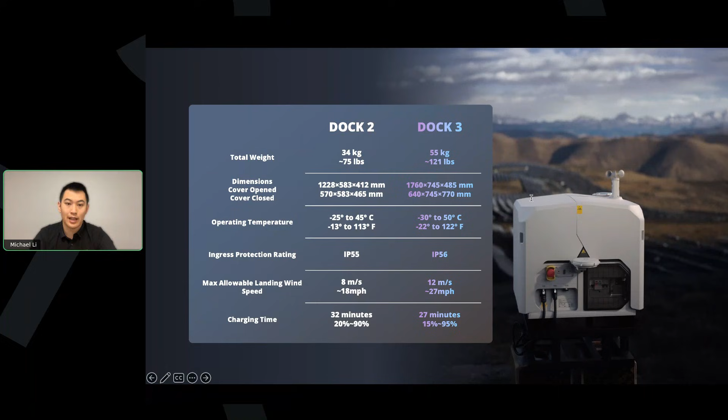We also increased the operating temperature specs, increased IP rating, and max allowable landing wind speed. So things just got overall better. The charge time was also decreased, allowing 15% to 95% charge in only 27 minutes.

So some of the use cases I've seen with the Dock 3 being used currently right now - this is an example of pipeline inspections and saltwater leak use cases in the oil and gas industry. We have underground water transfer lines, and when there's a leak, you're able to essentially inspect the vegetation in the nearby area to see if that leak is happening.

Also for buried lines, we were able to inspect them and assist in watching for any vegetation loss.

And then above ground or new leaks, you can use the Dock for any thermal imaging detection.

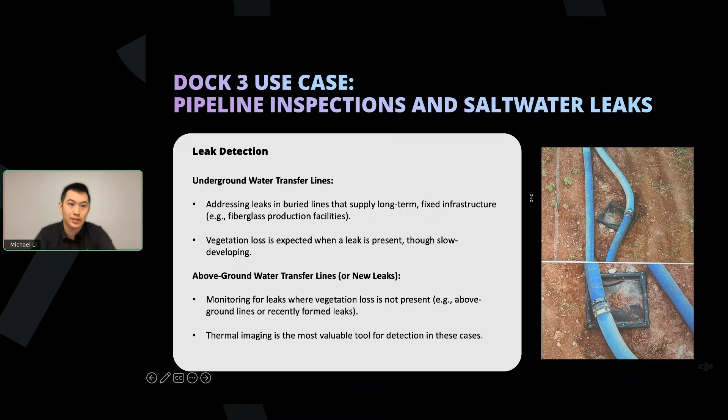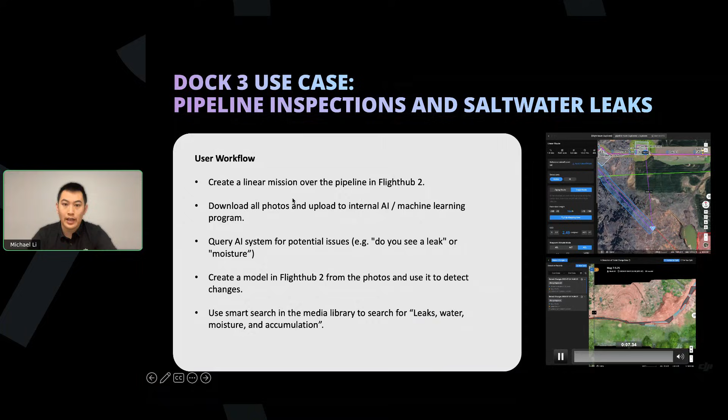They were also able to use the Dock 3 for equipment inspection. The Dock was able to help check gas meters for integrity, tanks for levels and spills, and also inspect separators for leaks or smoke, flares for any flames, and wellheads for any vapors.

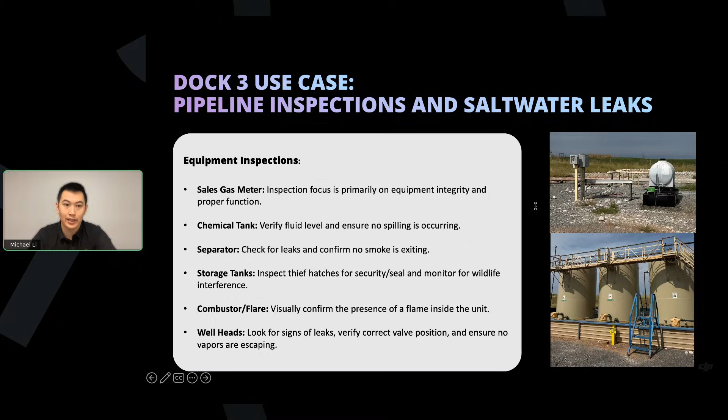For this use case, they were able to use the virtual cockpit in FlightHub 2 to control the drone and take off. They were able to use side by side view to get visual and thermal at the same time, and they were also able to save annotations and any media, all saved within FlightHub 2.

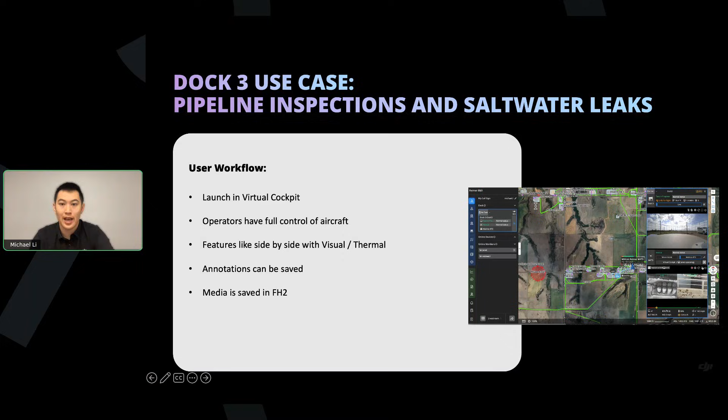So this is kind of a sample of what they would see in FlightHub 2 while flying.

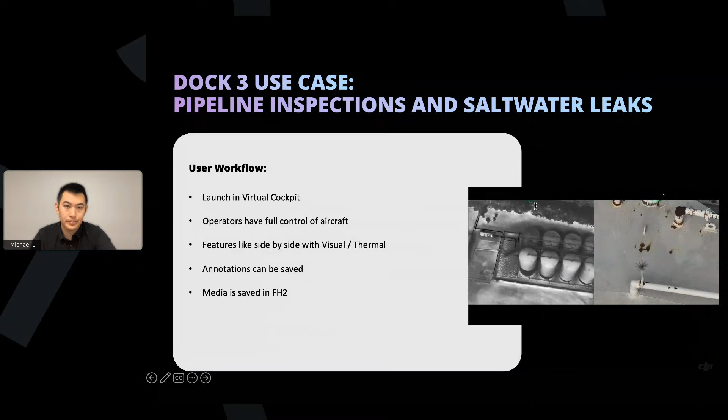Another use case within pipeline inspections and saltwater leaks involves drilling completion, which includes pad preparation. They're able to inspect these rigs for safety and operational details. This phase includes a lot of challenges and is pretty costly.

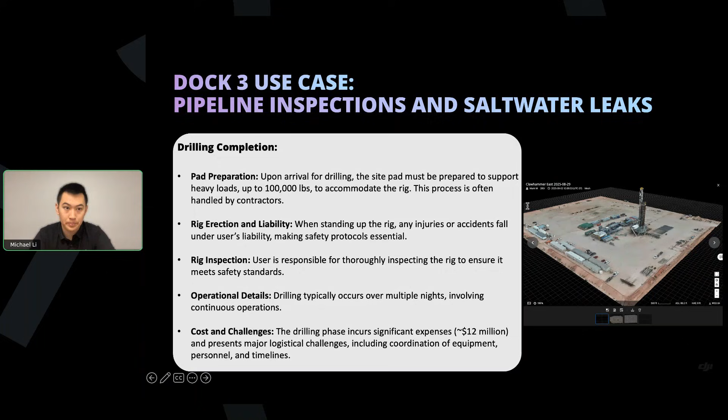You can see in this photo they were able to create a model. What they did was, in FlightHub 2, they created a simple route around the drill rig, and they were able to generate a model to have different models and inspect it over time.

On top of that, they were able to take panorama photos around the drilling rig. You can see this panorama photo right here in FlightHub 2 is pretty useful.

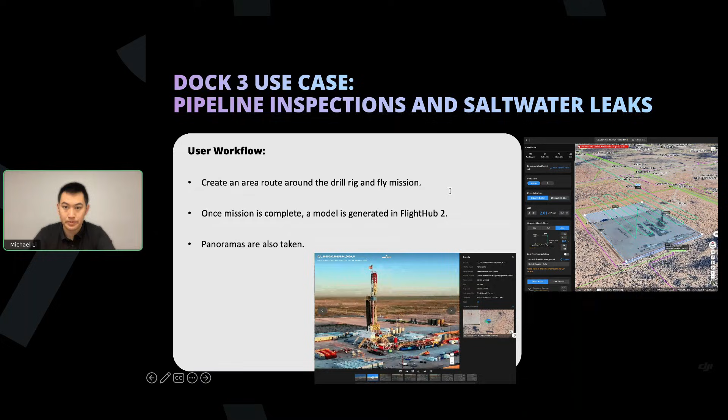Okay, going into the Matrice 4D, the 4TD, the 4E, the 4T, and the 400 -- these are our drones on the Enterprise side.

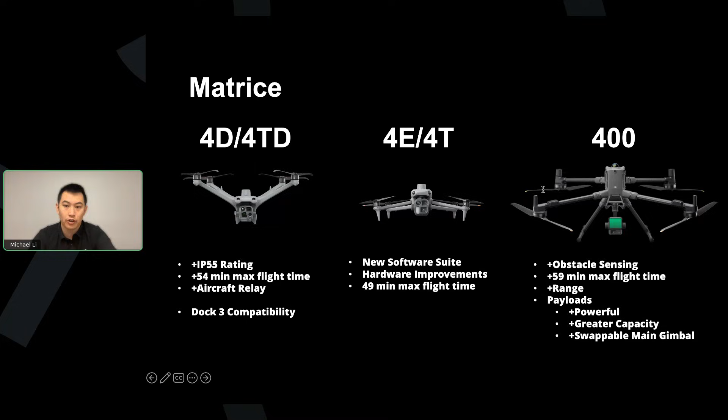Going over the Matrice 4D and the Matrice 4TD, this is the one that's inside the Dock 3. Then we have the Matrice 4, the Matrice 4E, and the Matrice 4T, which is very similar to the Dock 3 drone, but this is more of the entry-level Enterprise drone. And then we have our flagship Matrice 400 RTK, which is our biggest Enterprise drone.

Going into the 4D and the 4TD, reminder, this is the drone that's inside the Dock 3. So this one is the 4D. You can see some of the specs it has: a tele camera, a laser rangefinder, a mid-tele, and a wide-angle camera. So we have three visual cameras and a laser rangefinder.

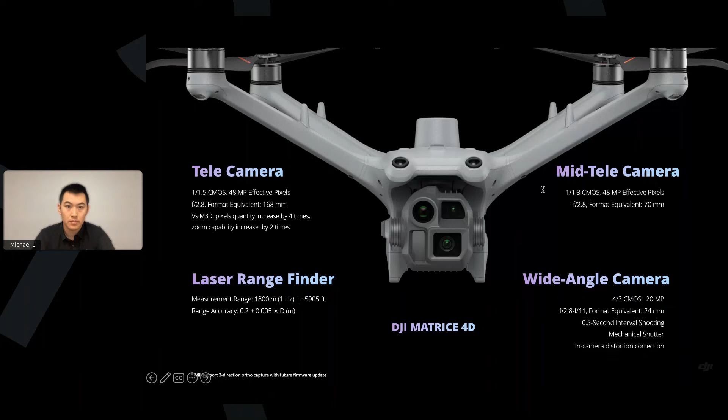Going into the 4TD, the main difference is having a thermal camera. The thermal camera is on the top left, the mid-telecamera is on the top right, the telecamera is right below the thermal camera, the wide angle is below that, and a laser rangefinder and a NIR auxiliary light are on the bottom right. So you'll notice the 4TD does have the thermal camera and the NIR auxiliary light, but with that we lose the 20 megapixel true resolution mechanical shutter that the 4D has.

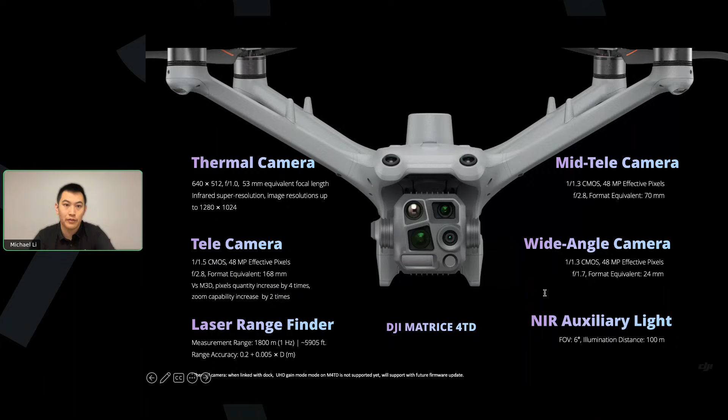So this is a quick video of the Dock taking off and being controlled in virtual cockpit. If you're not familiar, this is our software called DJI FlightHub 2. It's used to control the DJI Docks. In it, you can plan missions, fly missions, get a live view, stream, and do all sorts of manipulation to essentially control the drone.

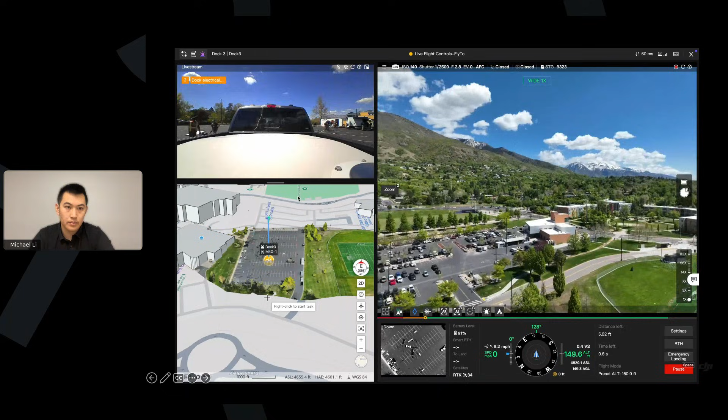So you see you can move the camera, take photos.

Going into the Matrice 4 and the 4T, some of these features you'll see are very similar and also available in the 4D and the 4TD. Now the Matrice 4E and T, we offer features such as AI to detect people, vehicles, and boats.

We also have a zoom now that goes up to 112 times. We've improved low light for better obstacle avoidance, night scene modes. We have precise mapping, also faster and safer takeoff. And then the range of the drones has increased significantly too, now with the 25-kilometer transmission with their new OcuSync technology.

Some key specs with this drone: 15-second fast takeoff speed, 10 meters per second ascent speed, 21 meters per second forward speed, and 25 kilometer transmission range. Also 8 meters per second maximum descent speed, and 49 minutes flight time. So that's increased by 6 minutes from its predecessor.

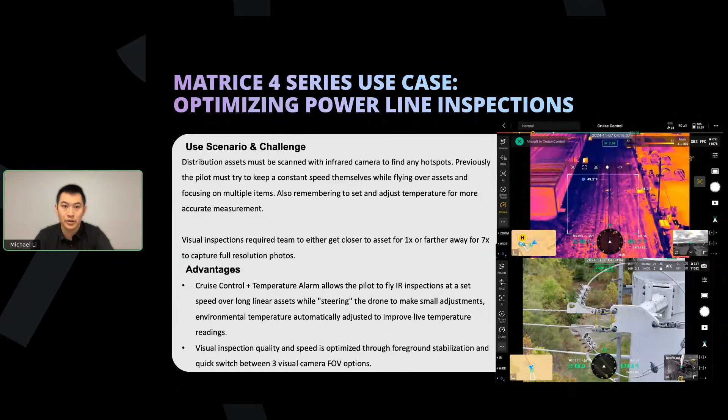Advantages, let's see if there's a video plays. The cruise control is used for steady speed. You can see auto temp alarms being adjusted in this video, and obviously you also have visual at the same time too. So you can see a pretty powerful small drone that's able to accomplish a lot for these powerline inspections.

Okay, going into the Matrice 400, this is our flagship, biggest drone we have on our DJI Enterprise side. With that, we're going to have multiple payload capabilities, including your H30, your P1, your L2, S1, V1, and now the new Manifold 3.

Some powerful specs include 59 minutes of flight time with the payload. That's pretty impressive, almost about an hour with the camera. You have 25 meters per second flight speed, 6 kilogram payload capacity, and that 40 kilometer range with OcuSync technology is pretty impressive too. You have real-time terrain follow, and also now able to ship-based takeoff and landing with the M400.

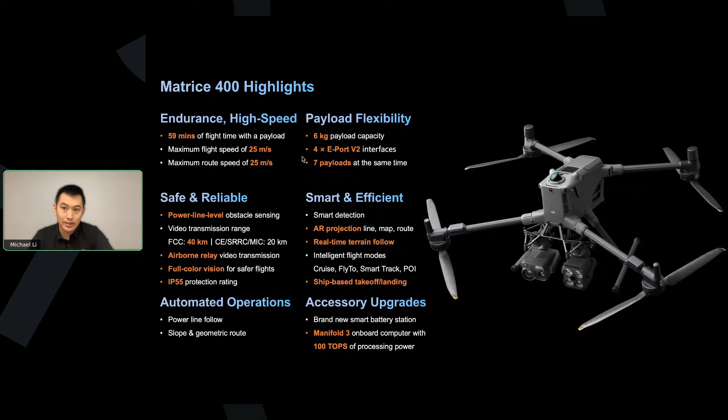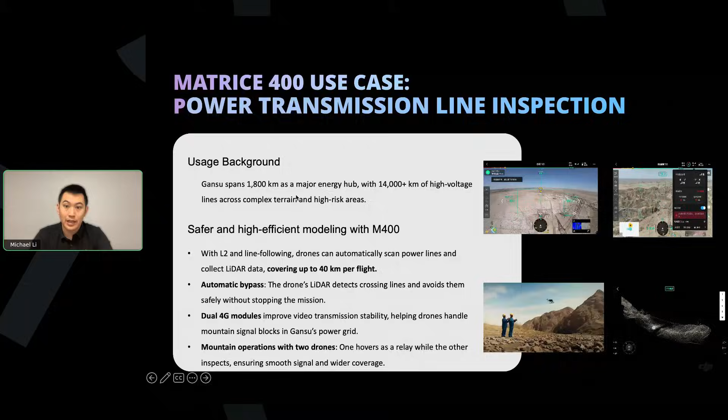Going into the Zenmuse L3, this is a new advanced LiDAR that's very impressive with 16 returns, 950 meter range. These are some of the new specs: 16 returns, 950 meter range, but these are some of the big highlights for the L3.

Some use cases I've seen with the L3 now is in Canada, they're able to use it for vegetation penetration for power line surveys. Some of the previous challenges with the L2 and the L1, they kind of struggled with density with maybe certain blocked areas. With this L3, that was not really a big issue.

Terra was able to collect data with pretty good deliverables. So these are some of the specs, some of the data capture and mission planning that they were able to successfully complete the mission. You can see the altitude and the speed, the overlap, they did it 50%. They did 2 lines either side of the power line.

And then they were able to capture using this point frequency and scanning mode, so 350 kilohertz and star with 8 returns. This is a new scanning mode that was selected for better accuracy and penetration. Flight time took only about 10 minutes.

One of the features I did want to highlight too, so this was the end result right here, the data processing output. They were able to utilize DJI Terra to generate these point clouds from the raw data, and then Modify is also available for any classification and refinement. And then Trimble Business Center was used for final output.

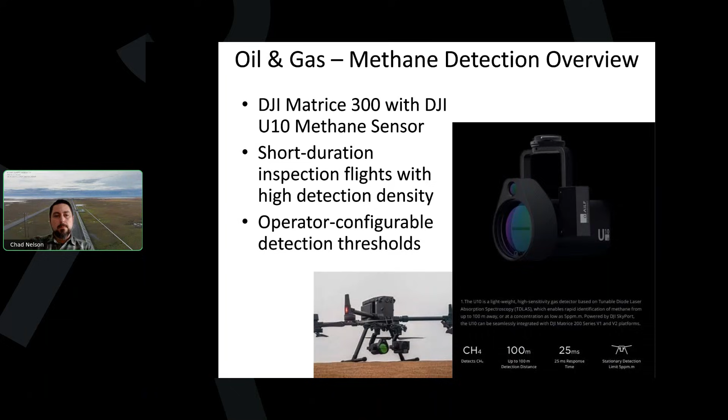Here you can see with the U10, we have the Alpha One inspection report. Alpha One is their software that generates the inspection itself. You can see our flight path here. During this particular mission, we did not have it tuned because we were specifically looking for not just leaks over a valve, which we'll show you where that valve was and where that leak was. Of course, the imagery here is old GIS imagery, so it doesn't show the valve in the image itself, but we can show where the pinpoint was. We were looking for that, and also fissures where there might be natural methane leaking out of the ground, which we did find in the actual riverbed, which was pretty interesting.

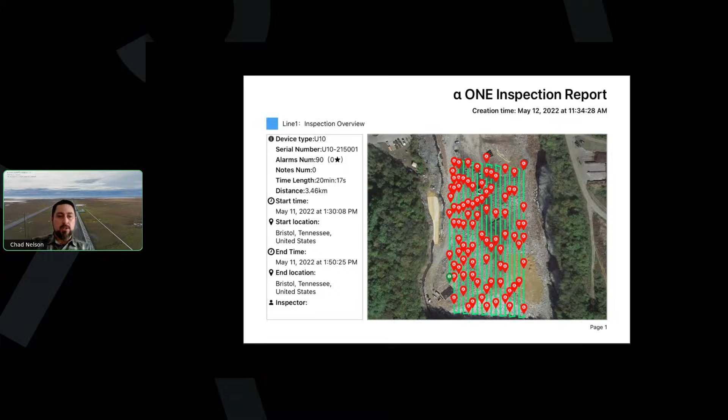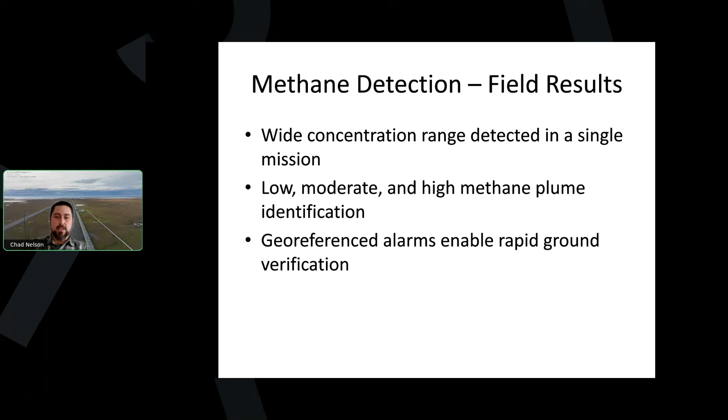Moving on to the next slide: field results, wide concentration range detected in a single mission. For this particular mission, low, moderate, and high methane plume identifications and georeferenced alarms enable rapid ground verification, allowing teams to be deployed to the exact location where the issue may be, whether along a pipeline, valve, pump station, or any other equipment within the oil and gas industry.

So here you can see we've got a hit at 2,640 parts per million. In this software, it's going to show all the different hits, but the hit right at about the center of the image is where that hit is actually coming from. And here you can see the range that we're looking at, from 36 parts per million, which was probably one of our lowest hits that day. Again, that's going to be around the center of the image where that particular hit is calling for. You can't see it right now because this just shows all the construction that was there prior to the valve being installed, but the valve was right about here.

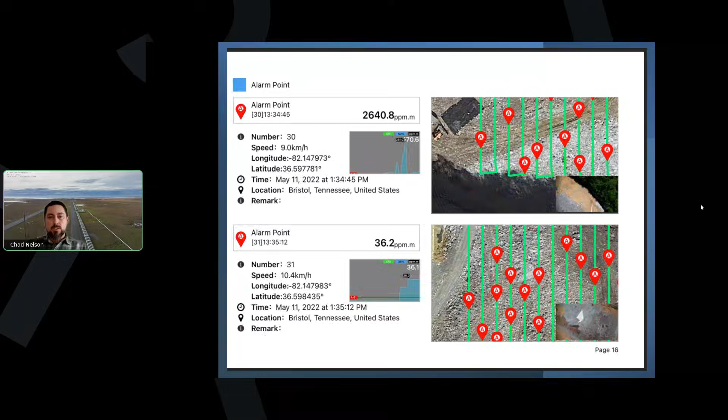Another application for the H30T is in the oil and gas industry, especially up on the North Slope where temperatures range from 50 degrees down to -70 sometimes. We've got missing insulation inspections along the pipelines, and you can see thermally where those issues are, and then also visually with the zoom camera on the H30T, where the side-by-side images really help out during operation.

These operations are generally manually flown, and as you can tell, this pipe is behind this pipeline, and as you can see down here, this is the actual roadway. So from the roadway, visually, you would not ever be able to see that missing insulation. Of course, on this main pipeline, you would on the higher picture, but behind that, again, you're not going to be able to see it from the roadway.

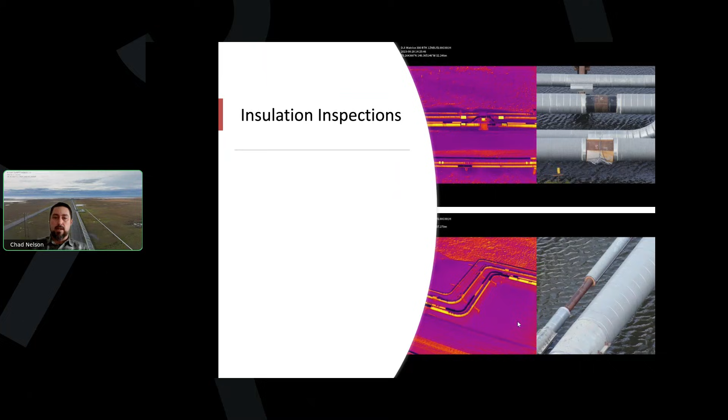So this is really key to be able to get aerial footage quickly and easily without having to deploy a manned aircraft, a helicopter, or a Cessna of any sort, and also much cheaper, safer, and able to operate in more adverse conditions as well.

Some field lessons learned: wind impacts gas detection more than altitude does. Of course, altitude is a factor overall, and there is a max limit where the U-10 will not be able to detect anything. But wind is going to generally disperse those plumes, and you're going to be getting hits all over the board, making identifying the exact location of that leak quite tedious.

For that, one of the things we do is use the Ventus OGI, or 640 OGI, which helps us visually through gem mode, gas enhancement mode, view where the actual plume is coming from.

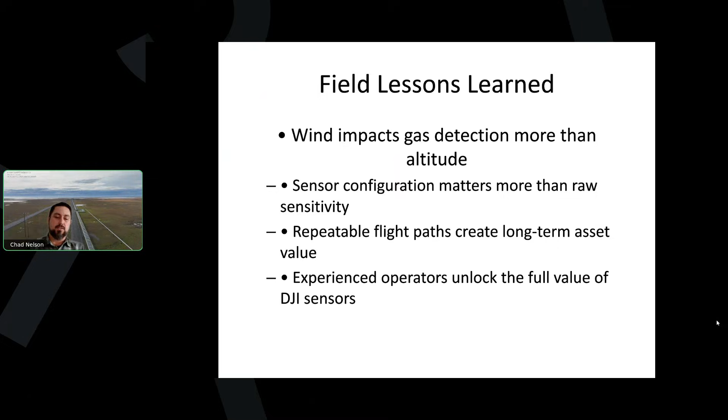On to power line inspections: transmission and distribution infrastructures, insulators, hardware, conductors, all performed without having to do any planned outages or climbing crews.

The H30T itself allows for superb data collection and safe standoff distances up to 50 feet from the asset. In these images, you can see we're probably more along the lines of about 40 feet from the asset, but we have our wide angle shot, our zoomed in shot at about 15 times, and then our zoomed in shot at around 30 to 40 times zoom.

And you can see here we've got a missing bolt, nut on this through bolt for the cross arm brace here.

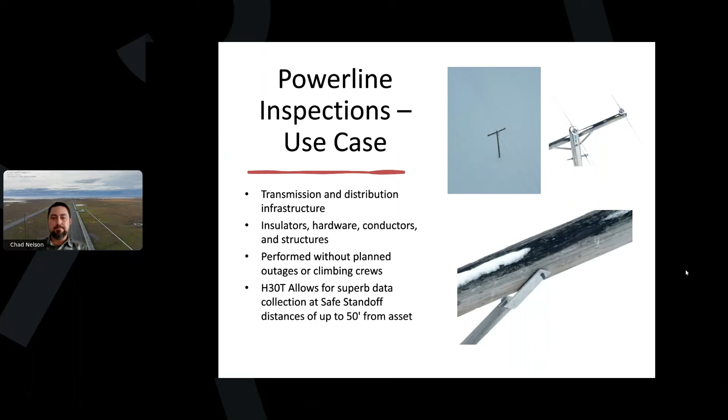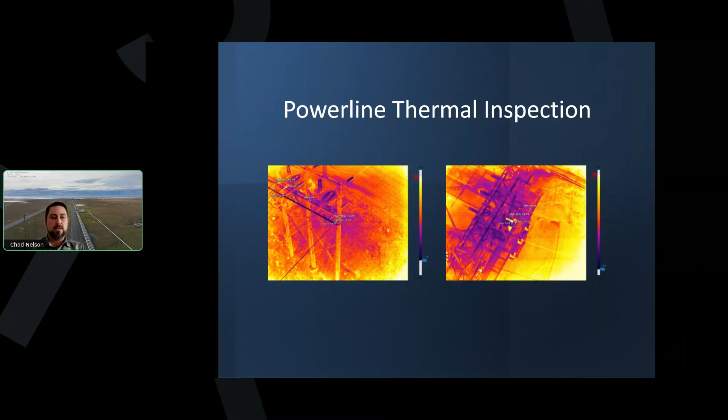Our power line inspections are generally going to be visual, RGB, and thermal inspections, where we look for hot spots within the utility corridor.

One of the softwares we like to use generally up on the North Slope, which we might be changing over to Polehawk by Wiggins Tech, allows for not just RGB and thermal data and reporting, but also for having all of your georectification LiDAR data installed there as well.

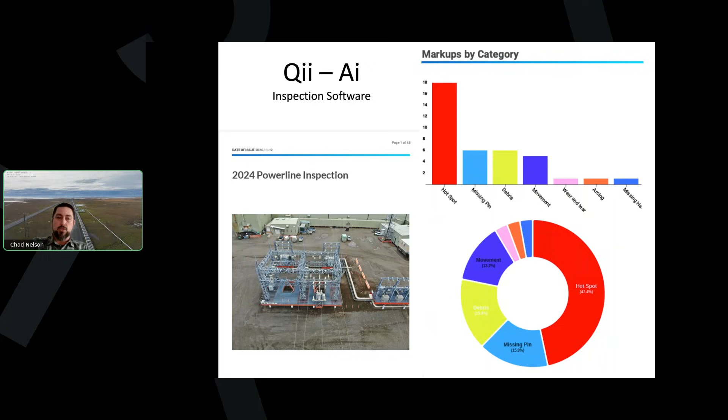I do want to mention we do use the L2 as well, and unfortunately for most of our customers, that data is fairly sensitive, so we were not able to get permissions to share that.

Of course, this Qii AI data, or Qii AI software, is able to take all of the data we've input and slowly learn more and more along the lines of exactly what failures and issues we're looking for. The longer you use it, the more information you feed it, the better it gets at detecting any of the issues.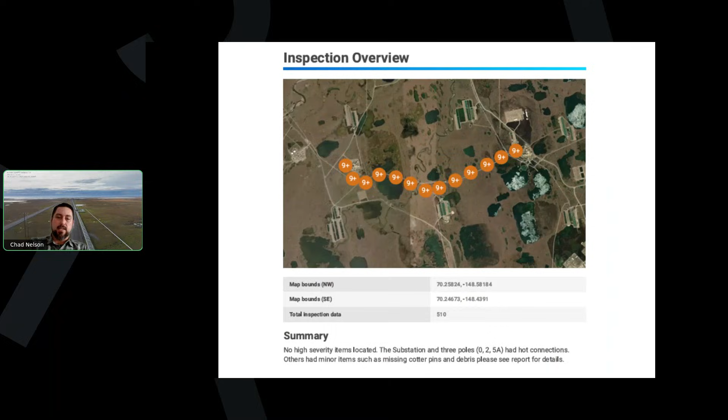So in case for some reason a pole is mismarked or the tag is off of it, they can always back reference the geolocation of where the image was taken from. Of course, that geolocation information is where the drone was, not so much where the actual pole is, but it does help quite a bit.

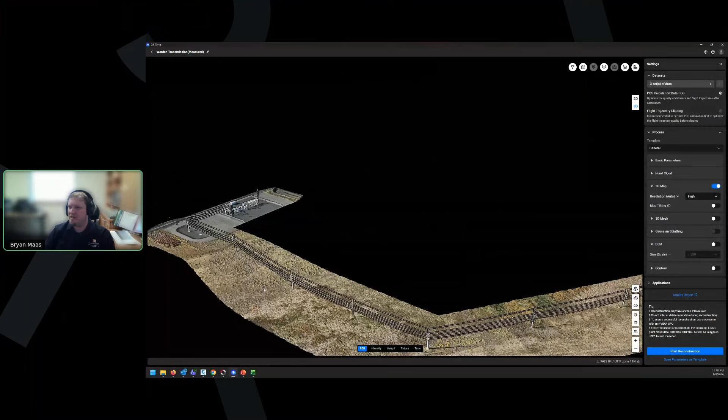Somebody would generally have to go out and they would have to take an insulated hot stick with marks on it. They would have to run this up and measure the whole thing. We figured out pretty quickly how we could go in and, with just out-of-the-box software, nothing particularly special about it, we went in and did this.

I know these are drawn at a bit of an angle, but when I show you the data here in a minute, it'll actually give you the vertical clearance instead of the slope distance. It gives you several pieces of data. So we took that and we did this over the whole line.

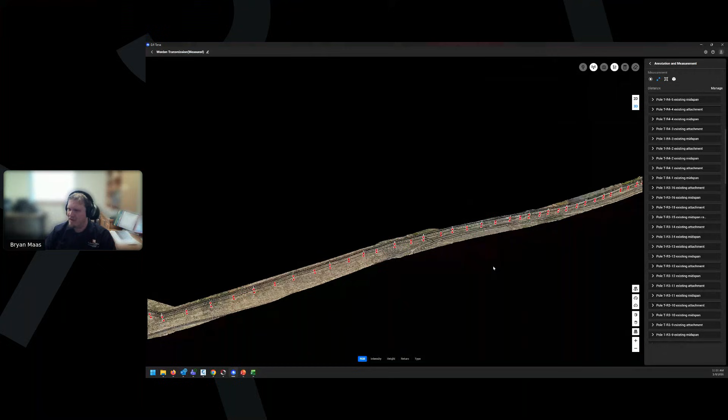As I said, it took about 20 minutes to fly the whole line. By the time you got out, set the drone up, flew it, landed, put it all back away, call it half an hour from start to finish. This data we were able to collect, came back to the office and completed it in less time than it would take to do just a handful of poles in the field by hand.

When we were completed, you got this list right here. We can export this list, and I'm going to see if I can show this here. We exported this list and we're able to output the data into a table, and it gave it to us. Here's your clearances, there's your vertical distances right there. Put it up in a table, put the names on it, and we're done.

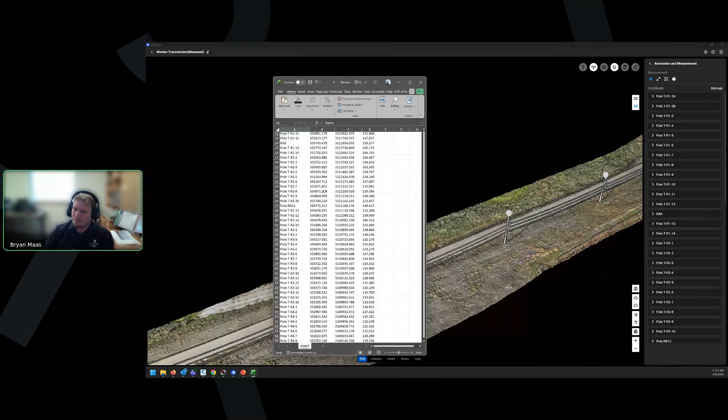It was that fast. When we completed that job, we realized that some of our GIS mapping data was just a touch off, and they were like, 'Hey, can we geocorrect some of those pole locations off that?' So DJI has built in where you can make a mark and then do the same thing. You can export a table, and so we did exactly that. We exported a table that gave all new X and Y locations in state plane coordinates for our transmission line. Handed that over to the GIS department, and they were able to correct all of our pole locations in the map. So we kind of got a little more bang for our buck out of that.

This is not by far and away not the most sophisticated thing we do with it, but this was a pretty good example of you can go in and get a lot of data very quickly, and then one guy can sit in the office and process that data to get specifically what it is that you're looking for.

Hey Bryan, next question: how long would staking all of those measurements out with a hot stick take along that particular circuit in general? What is your time savings there and manpower savings? For when we initially did it and sent somebody out to go do it, we were probably 2 days into it. Somebody had to get out there. This is in a fairly remote part of our system, so somebody had to go out, drive the whole thing, come back, come up with a game plan, go back out, figure out how, and started taking measurements. It was a process. We did it in one trip, and sometime between, I think we left the office at 9 and we're back by lunch. So it was about that fast.

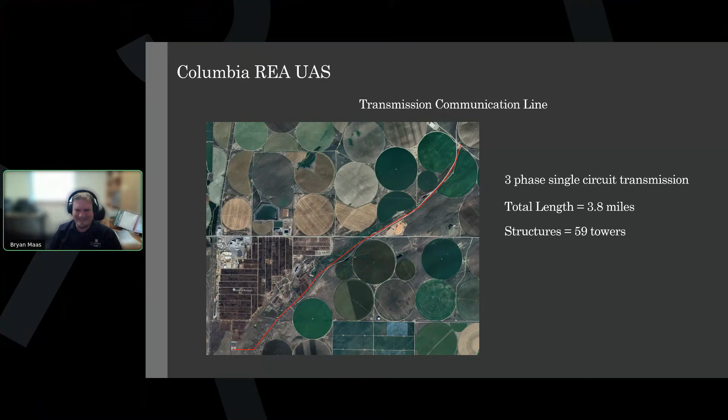But the next example I wanted to use, and again, this is just an example of something that we've used it for in the past. By no means is this the most sophisticated thing we do with it.

We got asked to put in a temporary overhead power line to serve a construction site that was going to be, they're building a new warehouse in an area where we were working. We got asked, okay quick, we got to go out, we're going to throw this design together fast. They need power, we're making this happen. And we had some permitting concerns and some design concerns we had to get through.

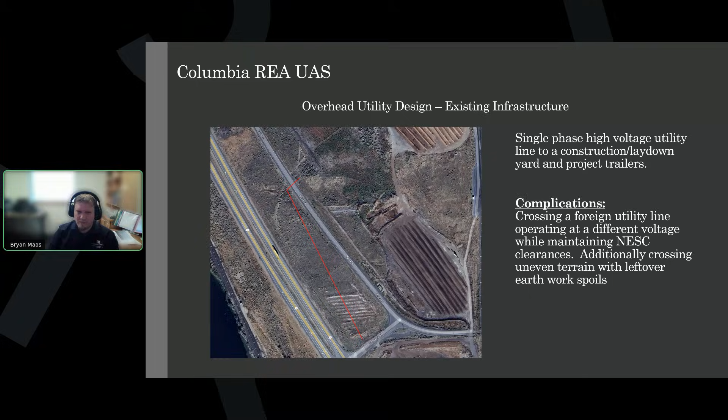Again, under kind of our old modality, we would go out, we would have to kind of topo this area a little bit, figure out where the ground is at, how we're going to have to get through there. This was compounded by the fact we had to cross a foreign utility provider in the interim. So I've got a picture here. Our utility line is on the left, this is our utility line over here, and we had a foreign utility on the right.

For those of you that have ever designed utility lines before, you know that this is coming into a bit of a unique problem here. We have to maintain clearances from the ground, so we have the code book we have to keep track of, but we also have to maintain clearances from the foreign utility. You don't want to go over them because that creates issues on its own, where if you accidentally fall into them, you have to have a whole myriad of protection in place to make that happen. So we had a very narrow gap we were trying to shoot that went right through the middle of this.

I'll hop back over here real quick and show this. Just a second here.

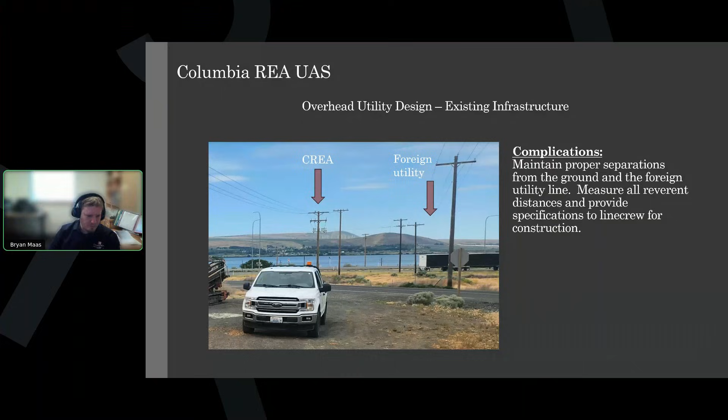One of the other in-house tools we use to design with this is taking that data from our drone and importing it into AutoCAD. With the drone, we went out and flew our crossing. We flew the ground that we were going to be building over the top of here, using AutoCAD Civil 3D, which digests DJI outputted data from their digital elevation model incredibly well.

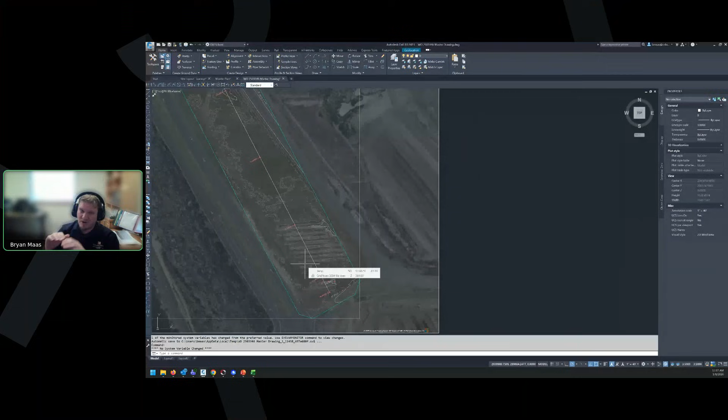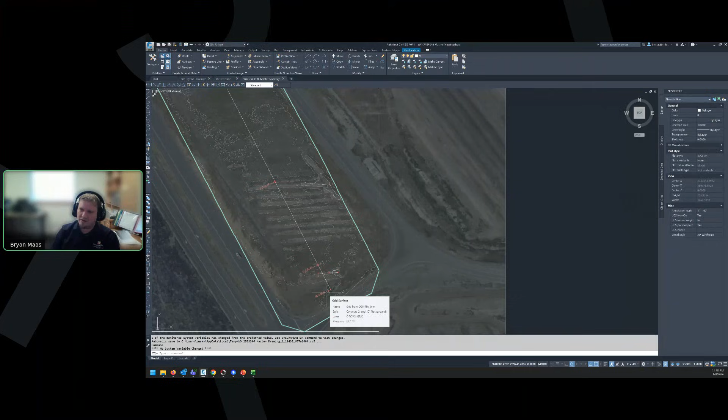That was honestly one part that genuinely surprised me, how compatible it was. DJI puts out a very rich and generic digital elevation model file, and AutoCAD Civil 3D digested it, and very quickly we came up with what the ground looked like, what the profile needed to be, and then we did a side shot profile.

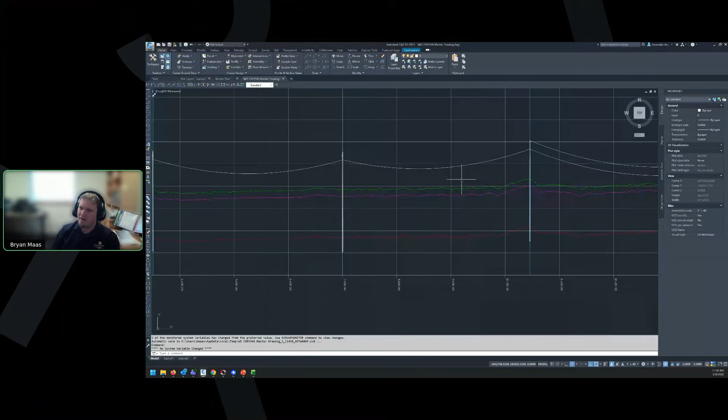So here you can see our pole on the left. This is the foreign utility. There's the phase carrier, the neutral, where we needed to be, and how we designed that to fall through there. And then we continued to design out what the sag of that wire needed to look like. Here at the very end, you can see where we crossed the road, right here, where we came across the roadway.

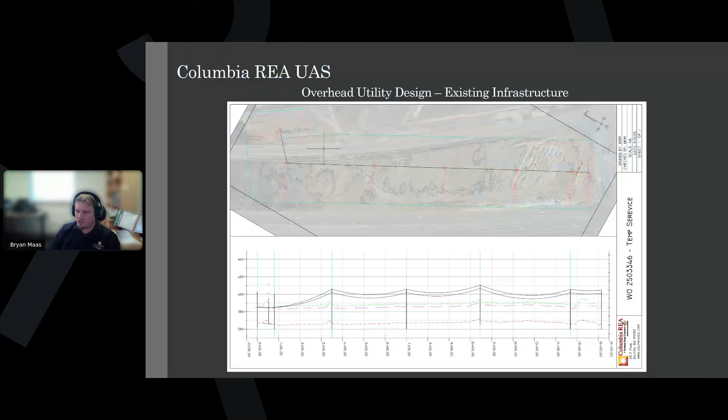So in very short order, we were able to come up with the design, which we then sent out, and we came up with a set of permits that we handed in to our local government agency to make that happen. All in one flight. Honestly, with this particular flight, it took longer to get the drone out of the box than it did to do the flying.

Consistently, that's the part that has impressed me, just how fast we're able to pull back what normally took us, at minimum 45 minutes to an hour and a half, running around out there in the field, hopping fences, trying to figure out how to get into places to take points. The drone just made this so much easier.

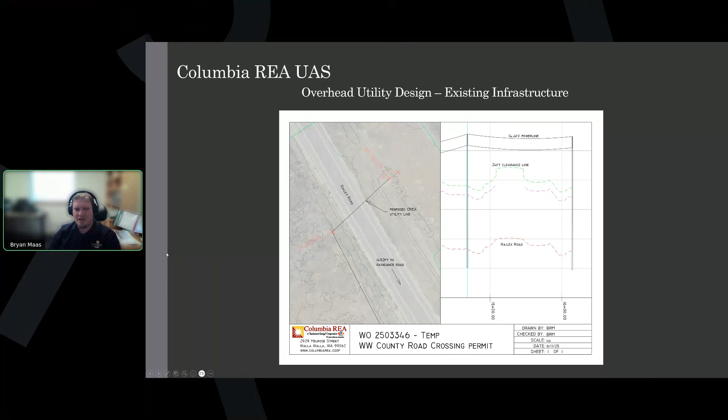We needed to get in here and lower the neutral wire. Again, we're staying above the legal minimums, but we needed to know how much room we had to come down and if this was possible. So this was, I won't say an emergency situation, but urgent. The operations department came to us at about 9 o'clock in the morning and said, this is a problem, we need to deal with it now. Let's come up with a game plan.

And again, we went out, we flew this thing, and by noon we came back with the answer. So it was a rapid way to get this.

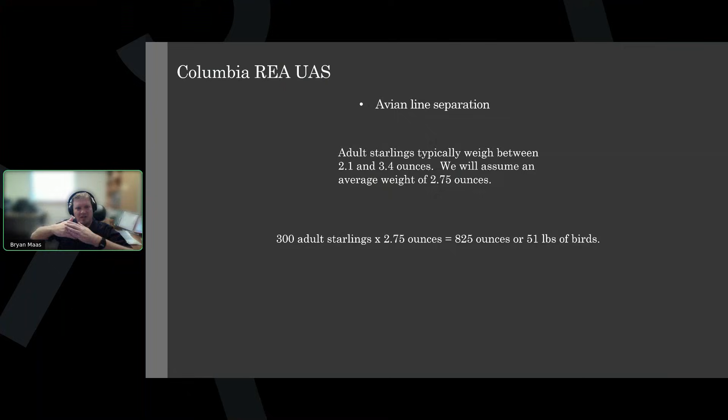I did the math because I work in engineering, so of course I did. By the time you put 300 adult starlings, weighing about not quite 3 ounces each, you had 51 pounds of birds taking off and bouncing the wire up and down, which was causing it to smack into each other. So we went out and took some data on that.

The idea was to figure out what our minimum clearances and approaches were to the ground at each one of these, do a quick temperature calculation, find out what the sag of the wire was in that moment, and then figure out how far down we could drag the wire to meet those clearances.

Again, this thing flew — this whole profile was flown in 15 minutes, 12 minutes, something like that. It went very quickly.

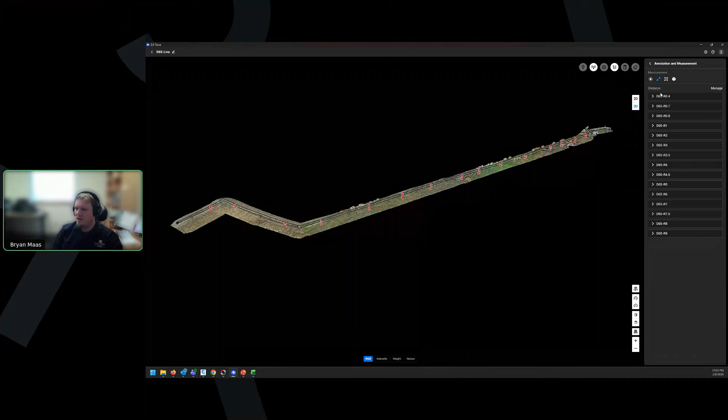And I'm noticing kind of a theme here — while we were doing this project, we ran into a tree trimming concern. The drone paints a very clear picture, particularly when you're looking at the point cloud data that comes out of it. We had a location where we very much needed to get the tree trimmers back out there for a contract that was finished, to have a look at.

So again, this worked out amazingly well. If I had to pin a word to it, I would say time savings. This has been a consistent theme for us in getting a hold of this.

I think where a lot of people go with this is, oh, you're at a utility and you have a drone — and as Chad showed in his presentation, there's a lot of inspection work that can take place with that, which is really cool. You can go out, get a ton of pictures, a lot of data, bring that back. You're finding missing cotter keys, things that are too hot, things that should be hot that aren't. That's important, and getting that big data back is a big deal. What is often overlooked, in my opinion, is the operation side of the business — trying to find those things that are broken. That's very valuable.

On the engineering side, there is a ton of time savings to be had if you're looking at it as a design tool. That's the one thing that myself personally and our organization found out — just the amount of time savings through the different processes we came up with, finding a lot of these things beforehand. Before we even sent people to the field, before the guys who build the power line even show up, we were able to get a large amount of data, and that really helped our design.